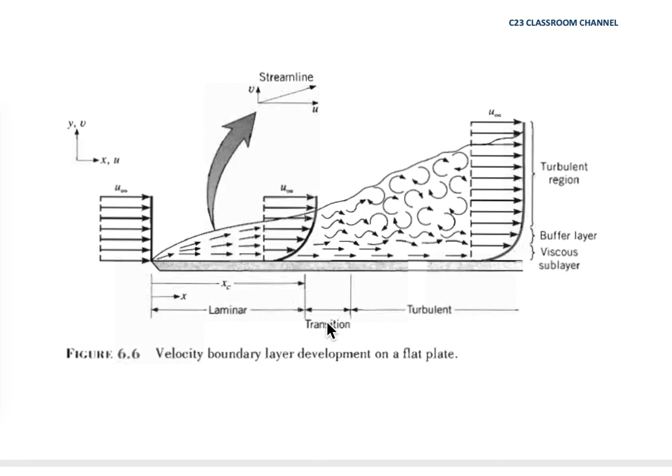So for this syllabus, we have three conditions. One is laminar boundary layer, which means it is fully laminar boundary layer. That means if we have a plate here, all the boundary layers here are in laminar flow.

And then at last we will see the condition of laminar and turbulent boundary layers like this. The situation is when we have a thin flat plate like this, and we found that laminar boundary layers are quite dominant in the flow, and then it continues with the turbulent boundary layers before it ends at this edge.

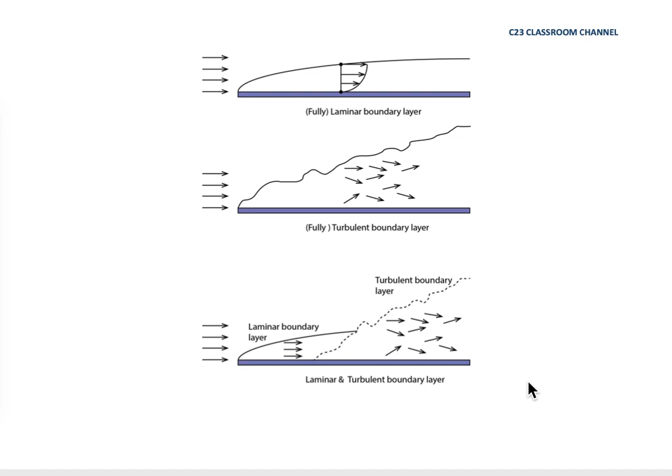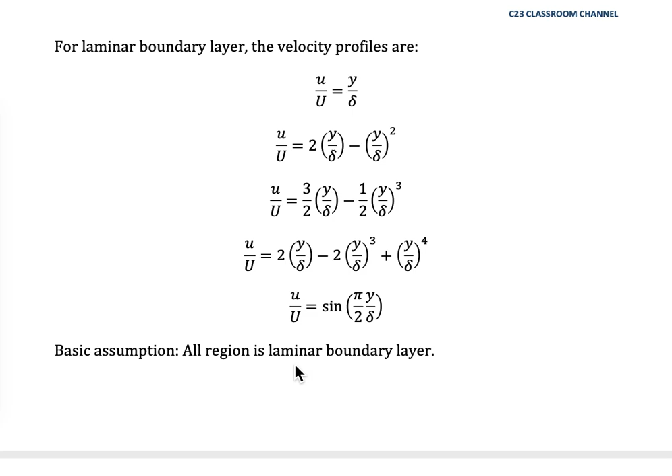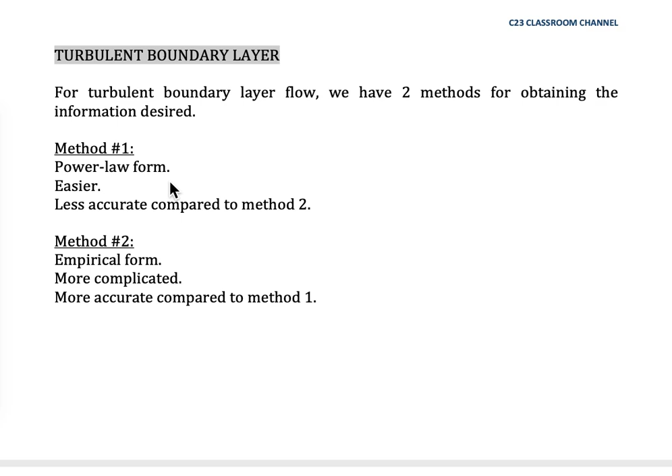Okay, I hope you could imagine turbulent boundary layers. Let's say we have one flat plate like this, and we have a free stream velocity flowing from left to right. When it hits the plate here, no slip condition occurs, and it creates resistance, and it creates boundary layers.

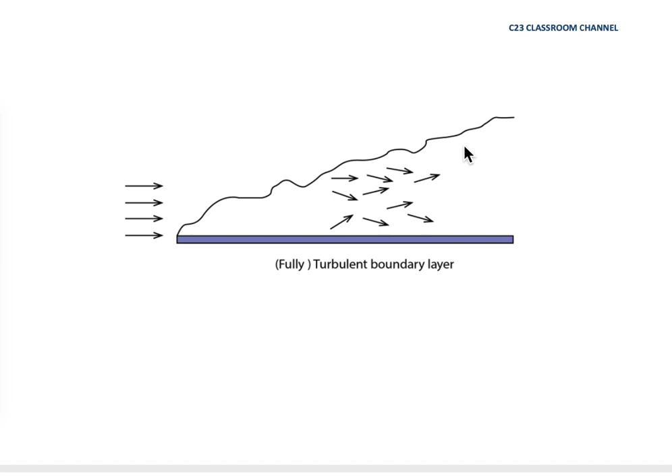However, the velocity here is chaotic, and it creates turbulent flow inside the boundary layers, and we assume that the boundary layer can be drawn a little bit rough like this. So bear in mind that in this calculation, we assume all the boundary layer here is in turbulent flow.

Let's say we have a thin flat plate like this, and we have free stream velocity flowing from left to the right, and it creates a boundary layer like this. So we assume that the length of this thin flat plate is L.

So please bear in mind that in boundary layer analysis, it is very crucial to differentiate between small u and capital U, because capital U here is the velocity of the free stream, and small u is the velocity of the local velocity profile.

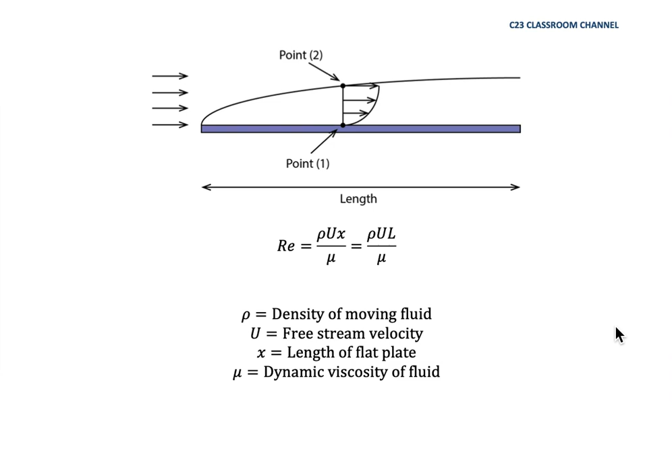So sometimes in another textbook, they will write that the turbulent boundary layer follows the 1/7 power law, meaning the velocity profile is y over delta to the power of 1 over 7.

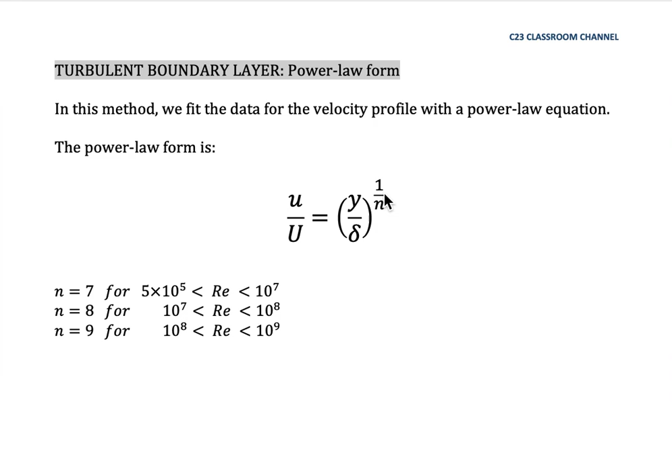Another thing you need to understand about turbulent boundary layer is that we will solve this problem similarly to the von Karman equation. First we need to do the von Karman equation to get the shear stress, and then get another value of shear stress by using Newton's law of viscosity.

However, for turbulent boundary layer, we cannot use Newton's law of viscosity, because in Newton's law of viscosity we have du over dy at y equal to 0, and this term will give us infinity in value.

For example, we have u over u equal to y over delta to the power of 1 over 7. If we do du/dy we get this term, and when we substitute y equal to 0, we find that du/dy is equal to infinity.

In terms of mathematical solution, it is correct, there are no mistakes in this calculation. But for solving boundary layer in turbulent flow, we say that the value infinity here does not match the real situation. So we cannot use Newton's law of viscosity in calculation of turbulent boundary layer.

So what do we need to do? We need to get an empirical relation introduced by the Blasius formula. We get this Blasius formula by doing the empirical calculation. However, in our syllabus, the value of shear stress from Blasius calculation will be given in the question.

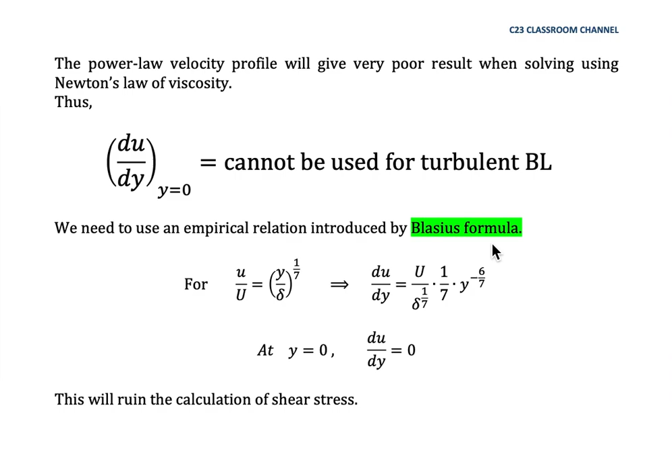Okay, let's say we have a problem like this. We have a velocity profile of 1/7 power law, which is y over delta to the power of 1 over 7, and we say that we could get the shear stress from the Blasius calculation as 0.0226 rho u square, mu over rho u delta, to the power of 1 over 4.

Bear in mind, sometimes in another textbook they will use nu over u delta instead. So you need to understand the relationship between dynamic viscosity, mu, and kinematic viscosity, which is nu.

So let's say we want to define what the boundary layer thickness delta is. We start with von Karman here, so von Karman is tau equal rho u square d theta dx. As we know, we need to find what is the value of theta.

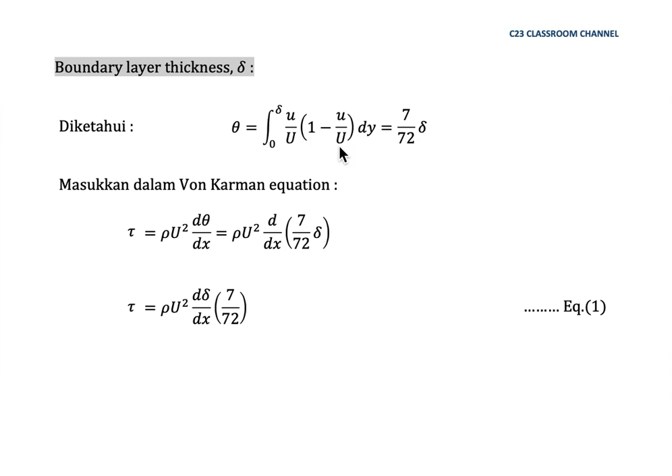For the 1/7 power law, we calculate the value of theta by using this equation. We substitute the value of u over u with the previous value, which is y over delta to the power of 1 over 7. In this equation, we found that theta is equal to 7 over 72 delta.

So we substitute the value of delta in this equation, and then we could simplify the calculation into this term. So we could say that this is equation number 1.

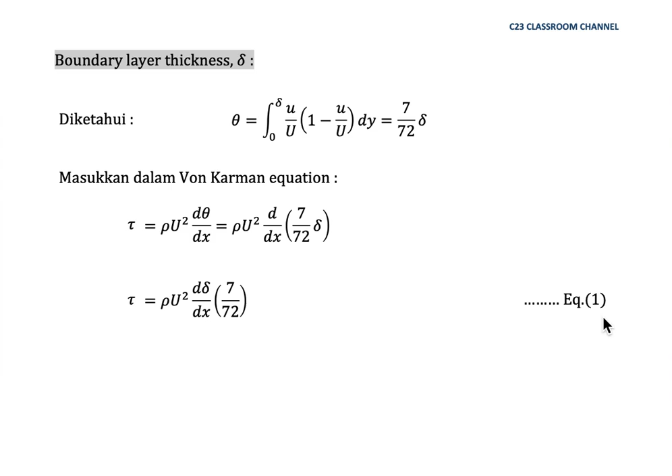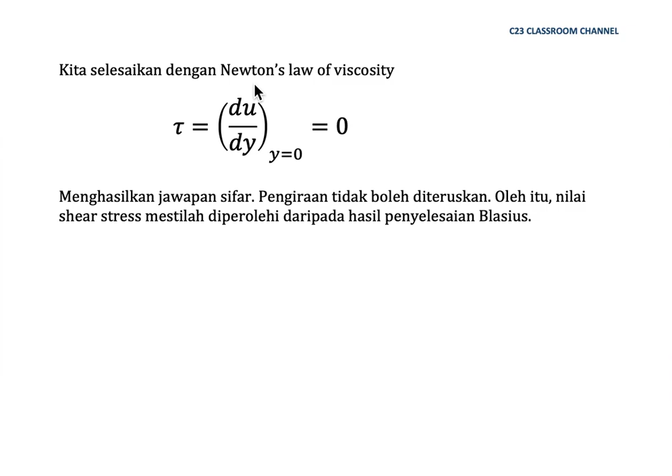I would like to mention here that we cannot use Newton's law of viscosity because the value is 0. So what we use is the shear stress from the Blasius calculation, which will be given in the question. So let's say in this question, the Blasius shear stress value is 0.0226 rho u square mu over rho u delta, by the power of 1 over 4.

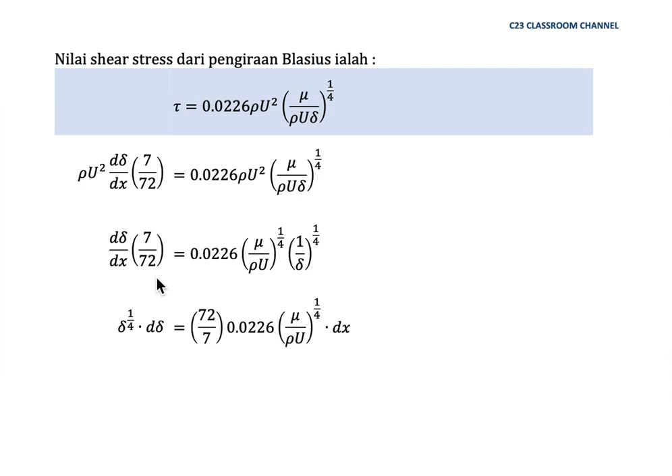So what we need to do is equate both values of shear stress - this is the shear stress from the von Karman equation, and this is from the Blasius empirical calculation. So we need to group the delta here, meaning we bring the value of delta by the power 1 over 4 here and remain with d delta, then bring all the other terms to the right hand side.

As we did previously, we integrate both sides and take the assumption that as x equals 0, delta equals 0, which gives us the constant equal to 0. Then we get this value after the integral process.

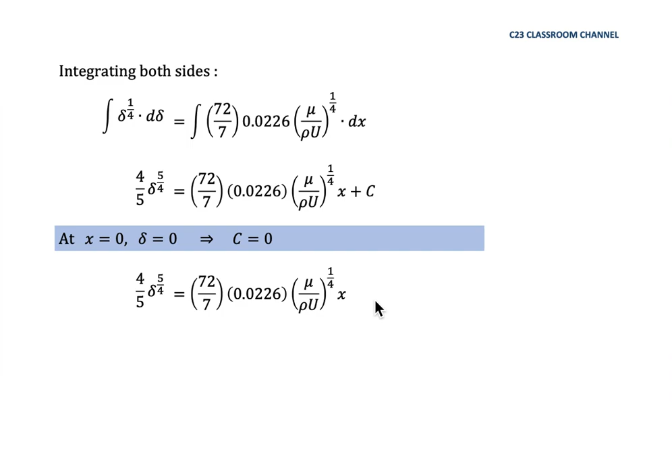Later on, we need to simplify this term, so we need to come up with delta itself. We could simplify it as delta is equal to 0.3721x over Reynolds number by the power of 1 over 5. This will also give the same final answer with this equation. However, it is compulsory for students to know how to convert this calculation into Reynolds number here.

Because in common equations they will transform this equation to become Reynolds number terms. So the idea is simple - to have Reynolds number here, we must have rho u x over mu. However, we have one element of x at the top section.

So what we need to do is multiply with x over x by the power of 1 over 5. So now we have rho u x, and then we multiply x by the power of 4 over 5 with 1 over 5, so we get x by the power of 1. That's why we have one term of x at the top here.

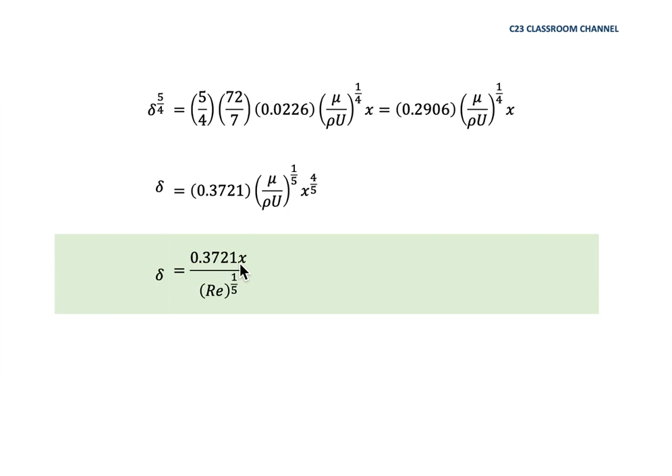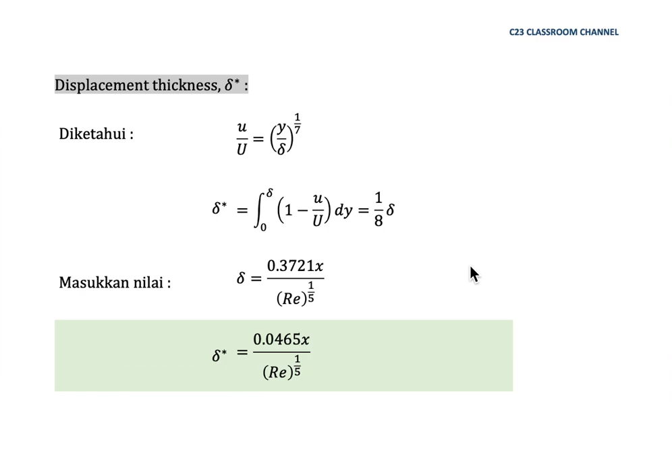So this is the momentum thickness. We have delta, and again we solve the equation to get the final answer here. We substitute the value of delta here with the previous answer, and we could say that theta is equal to 0.036x over Reynolds number by the power of 1 over 5.

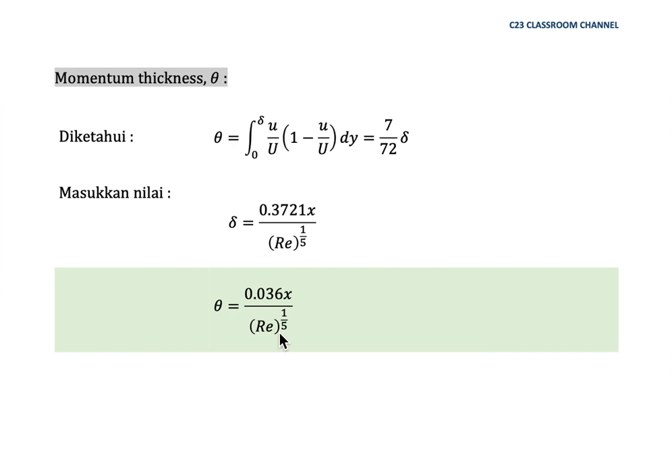So this is the shear stress, the shear stress from the Blasius. So I would like to remind you again here - we have two terms of shear stress. One is from the von Karman equation, and another one is from the Blasius empirical calculation.

I advise you to use this one because this equation is fully developed. For the von Karman equation, we still have d theta over dx, which means the equation is not ready to use yet - you need to do the integral process to get the final answer. So it is better for you to use the value of shear stress from the Blasius empirical calculation. Substituting the value of delta could lead us to get this answer as our shear stress term.

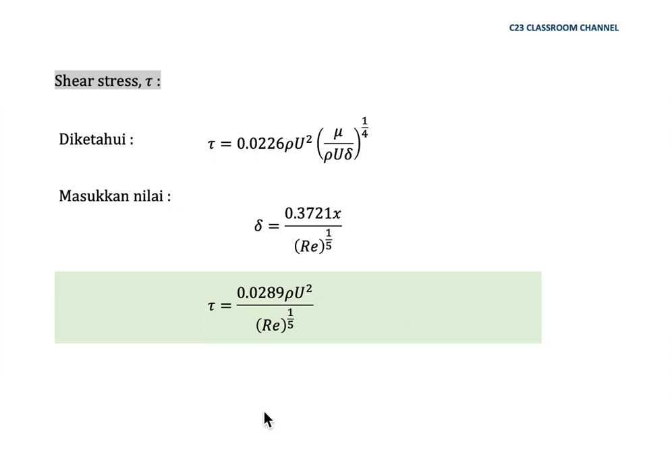Then to calculate our drag force, this is the common equation for drag force - the summation of shear stress and area, so B times dx will represent the area. We integrate from 0 to L, where L is the length of the flat plate. We substitute the value of tau from our previous calculation, and we could get the drag force as this one.

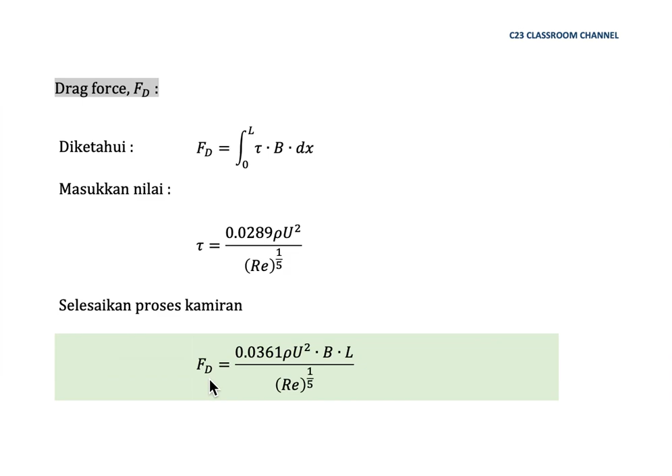Then to calculate the drag coefficient, as we know that CD is equal to drag force over 1 over 2 rho U square B and L, where B is the width of the plate and L is the length of the plate. We substitute the value of FD, and finally we could say that CD is equal to 0.0722 over Reynolds number by the power of 1 over 5.